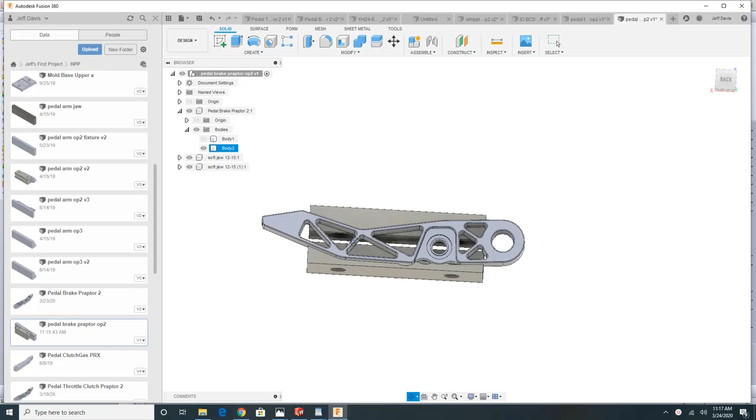Okay guys, let's program op 2 of this pedal arm with me. Again, I can't share the model, but follow along. I hope you get something out of it.

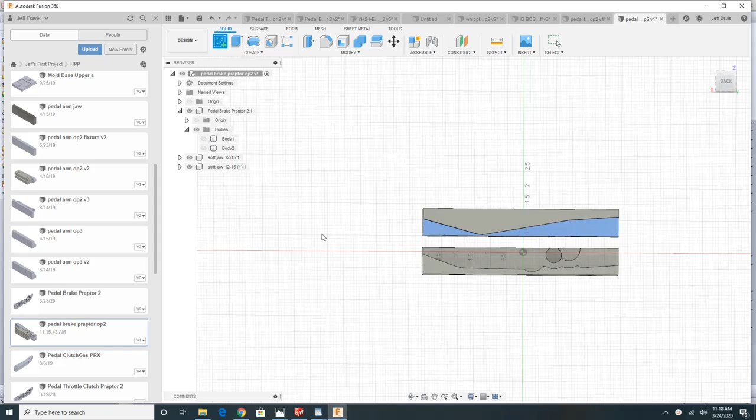So we have this thing in soft jaws, so we've got to cut the soft jaws first. I'm going to hide the pedal body and create a virtual corner on this, similar to what we did with the 1, 2, 3 block. So I'm going to create a sketch, and project that line and that line. Finish the sketch.

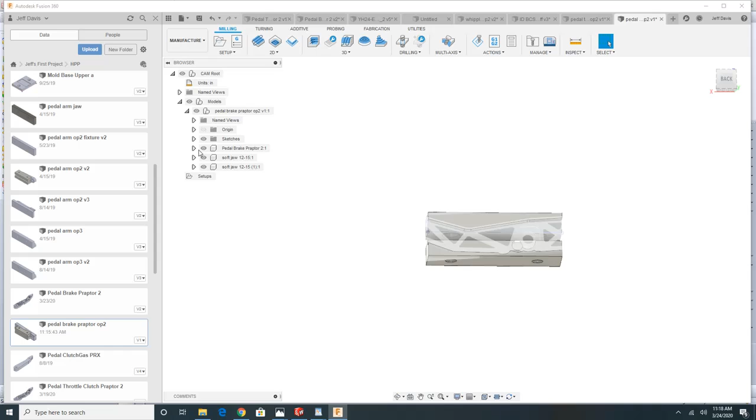Now let's go to our manufacturing forum. Let's open up these bodies here and turn them both on. New setup.

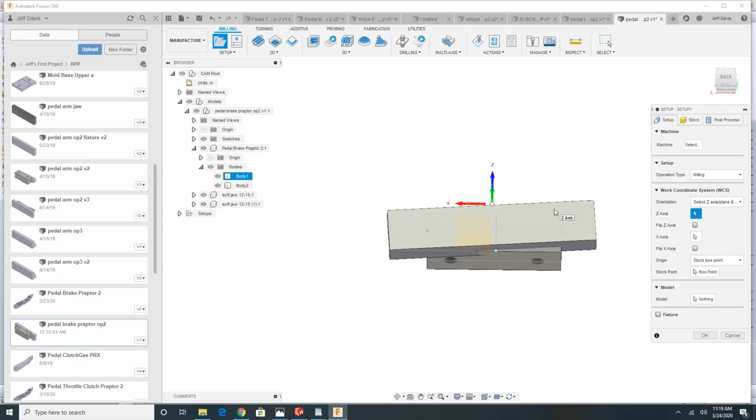For the stock, I'm going to choose this body that I've imported from SolidWorks. It's a milling operation. I'm going to choose the Z-axis plane and X-axis. The Z is going to be the top of the part, and the X is any one of these X lines that's going in the correct direction. Now, as far as where I'm going to put the work coordinate system, I'm going to use that virtual corner on the soft jaw that I created. And then I'm going to hide the stock and choose the pedal arm as my model.

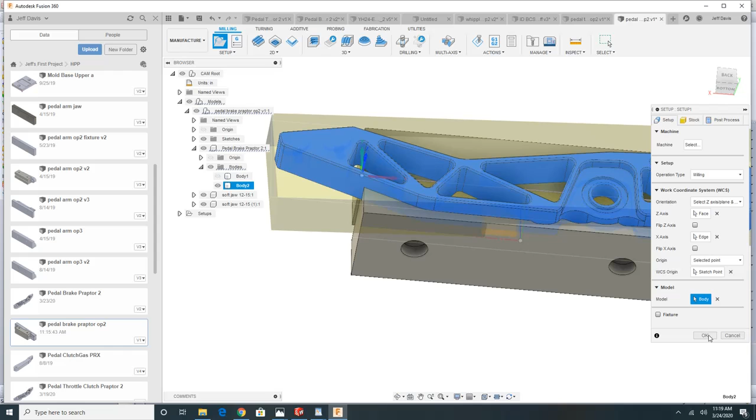Okay, what you guys might notice here is there's some extra cutouts. The reason for that is I'm reusing a soft jaw that was already cut out for something else. No big deal, we'll just kind of cut over it. So let's hide this body.

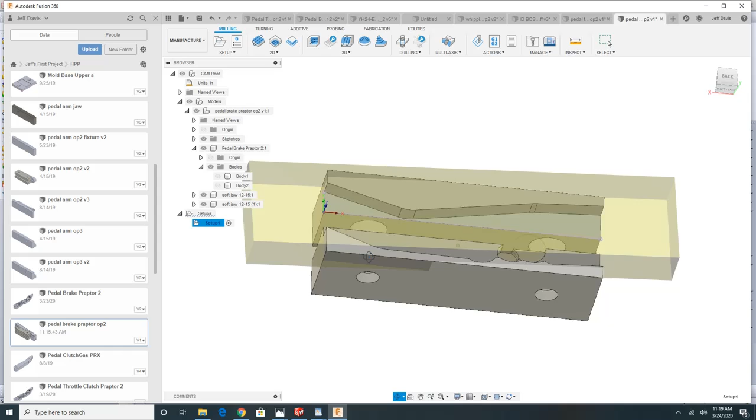What you can see is we've got our coordinate system. Actually, we've got our coordinate system in the wrong spot, so let's fix that. I projected it in the wrong spot.

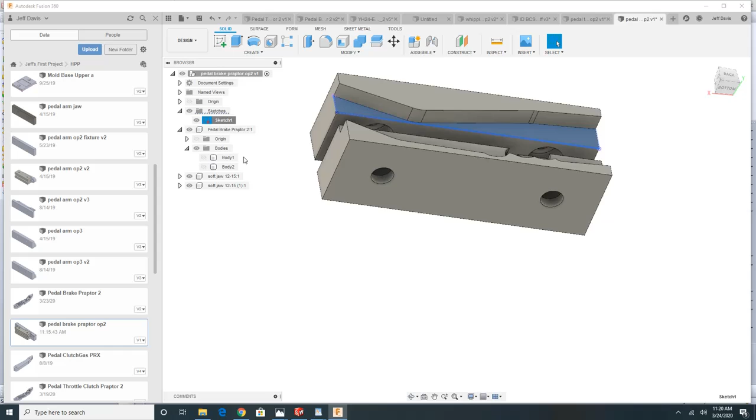Let's go back to our design and let's go into our sketches. And... edit sketch. No, I'm just going to do something else here, guys. I'm just going to create a new sketch.

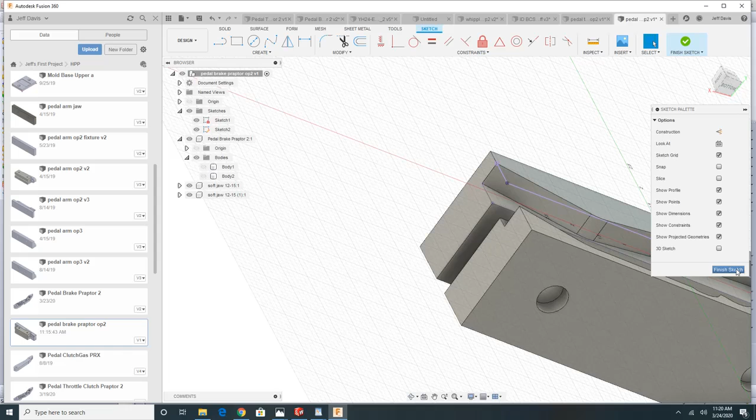On that virtual corner here, I needed it to be on the top. So let's go back and fix our setup. So the only thing that changes with our setup is where we've chosen our coordinate system. It's on now that upper sketch in the virtual corner, not the bottom one.

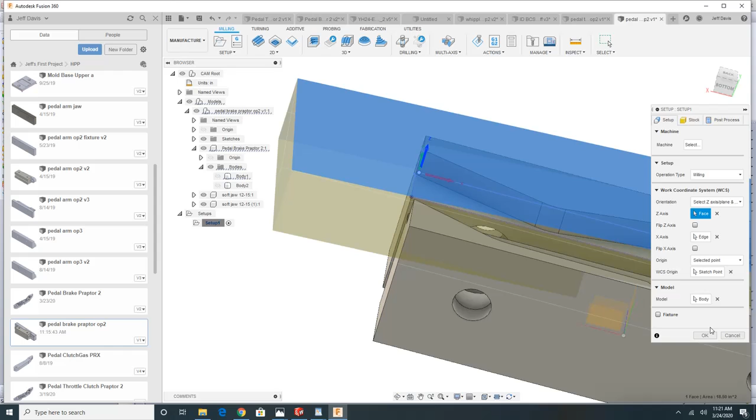Okay, so now, just for ease, I'm going to turn the sketches off. I don't need them at this point. So what I'm going to do here is I'm going to cut these jaws out in the shape of the pedal arm so I can hold it.

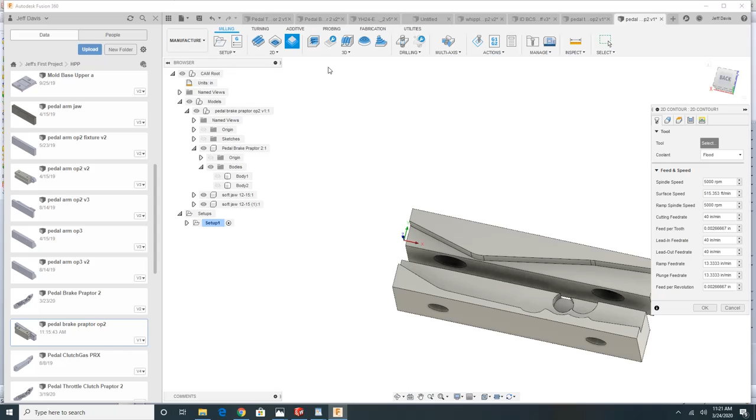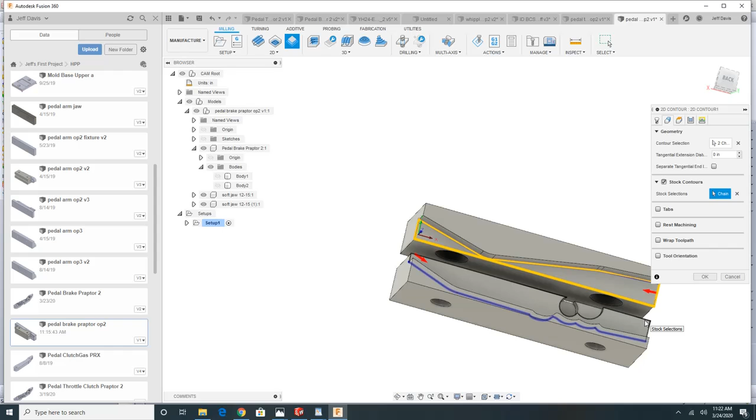I'm going to use a 2D contour, going with tool number 3, my 1/2-inch end mill. And I'm going to select those edges as my edges. As far as the stock goes, I'm going to select these edges. I don't like what that's doing there, so I'm going to come around to here. Now I've got the whole jaw selected as my stock, or the whole cutout as my stock. I can use the selected contours as the Z bottom.

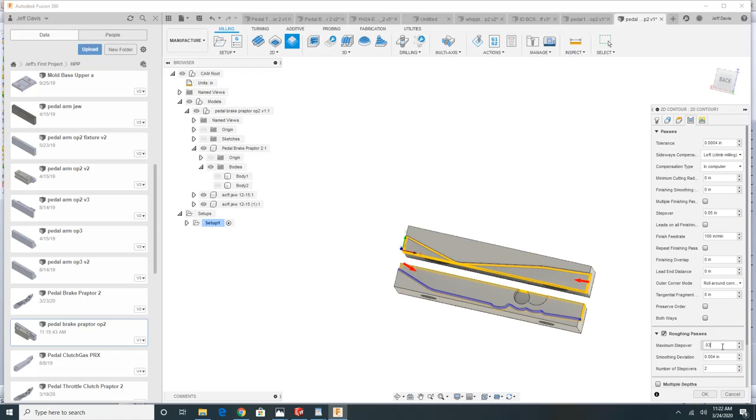And I'm going to do a roughing pass, 2 roughing passes. Let's make our step over 0.3. And that should cover it.

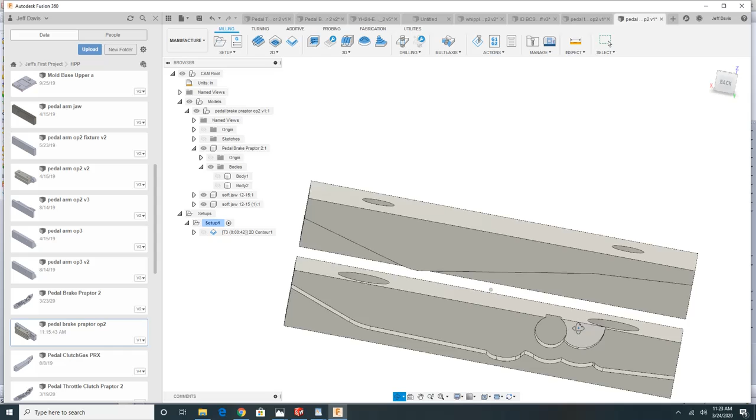So that should get this jaw cut out. I do need to cut out this right here because I'm going to run a reamer through the hole, and I want to make sure that that reamer doesn't hit bottom. So I'm going to simply make another contour right here, same 1/2 inch tool.

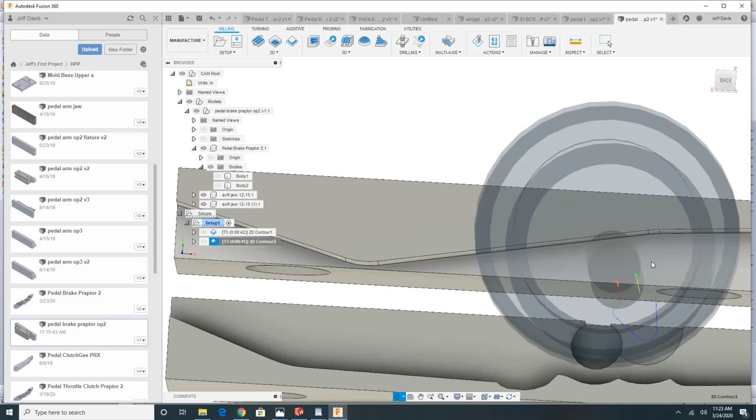And I don't like that because it's going to plunge into my stock. So let's do this. Let's give it a little extra. It might cut into the other side a little bit. That's fine, it's just a fixture. Okay.

So now let's start programming the part. Let's turn the body back on. It's making a 3D adaptive clearing. Tool number 3 is fine. I'm going to speed this thing rapidly up, 225 inches a minute. Lead in, lead out 500.

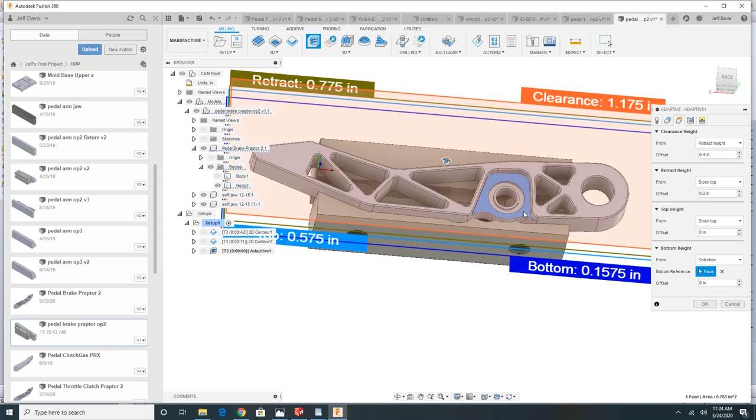Make our ramp 125. I'm not going to choose anything for the geometry. And instead of model bottom, because I don't want to cut to the model bottom down here, I'm going to make this selection right here. I'm going to make our maximum roughing step down 1/2 inch so that we don't have to take it in 2 passes. You guys can see that the stock to leave is 0.2 radially and 0.02 axially.

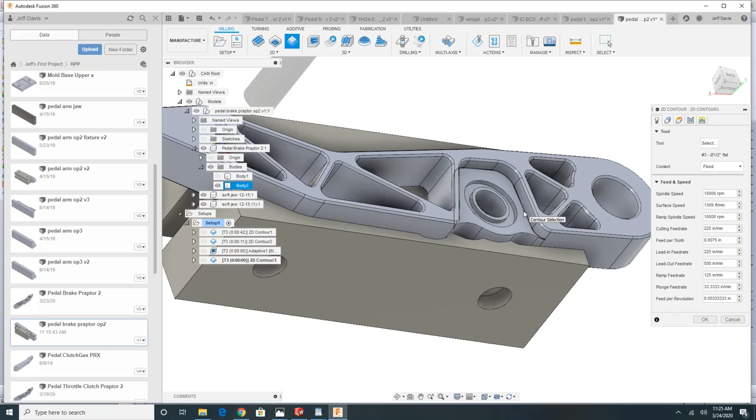So while that's generating, let's make a contour along that edge. Stock contours is fine. Fine. Roughing passes: 0.3. Let's go 3. And our feed rate's too high on this, so let's go back to 100 inches a minute. And let's see what we get. Okay. It's taking a little longer than expected.

There we go. So now we've got to cut the O-ring groove. Again, that's a 1/8 inch end mill. It's a contour. I'm going to select. Now guys, I'm going to cheat a little bit because I just programmed the other side of this, so I've got my tools all set on the other side. So 1/8 inch end mill, 10,000 RPM, 35 inches a minute. You can't go too fast on an 1/8 inch.

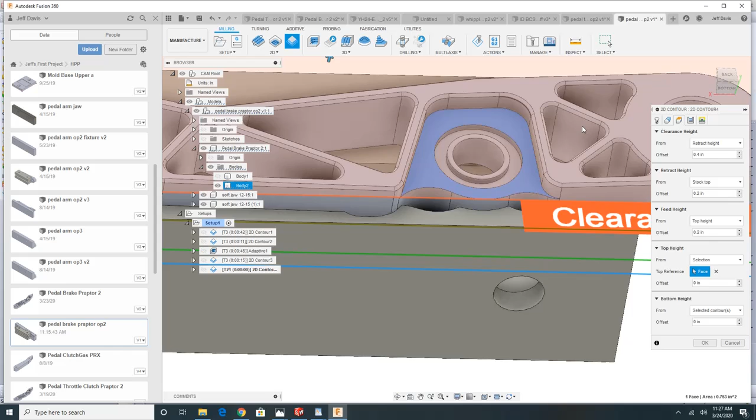Select the bottom contour. This groove is 1/8 inch, so we're going to be basically finishing it all in one shot. But we want to select our top contour as that so that we don't start our ramping way up here. So let's go to ramp. 2 degrees is fine, but we need to take the lead out. Very similar to what we did before.

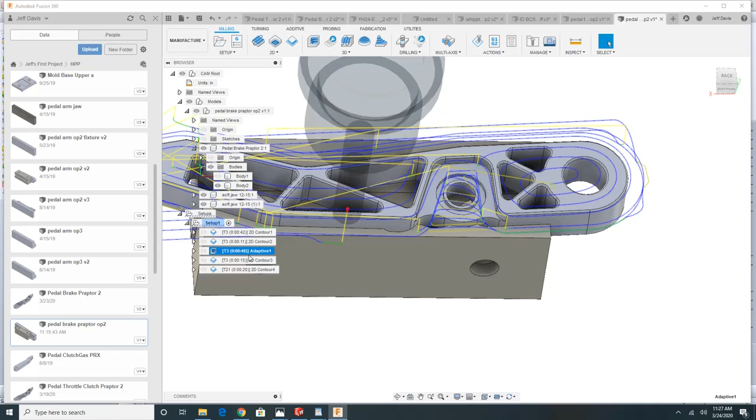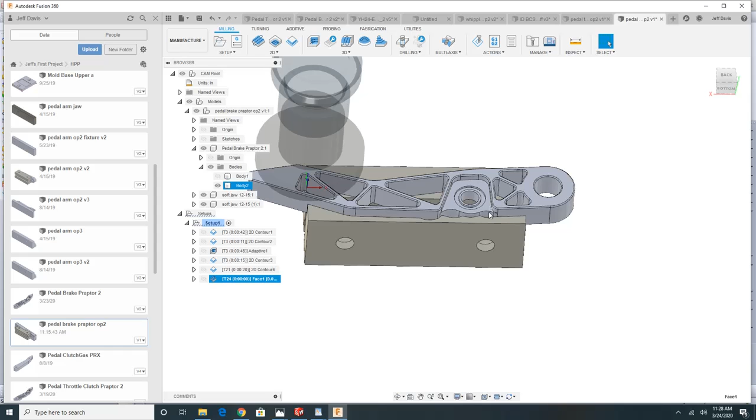Okay. So we've got it roughed. We've got that floor and that wall finished, and we've got our O-ring groove finished. So now let's go ahead and face this thing off. Choose face. I'm going to go with my 3-inch face mill. For me, that's tool 24. 6,000 RPM, 90 inches a minute is fine. You can leave that alone. Let's choose the selection. Let's go over here to climb cut and extend before retract. Okay.

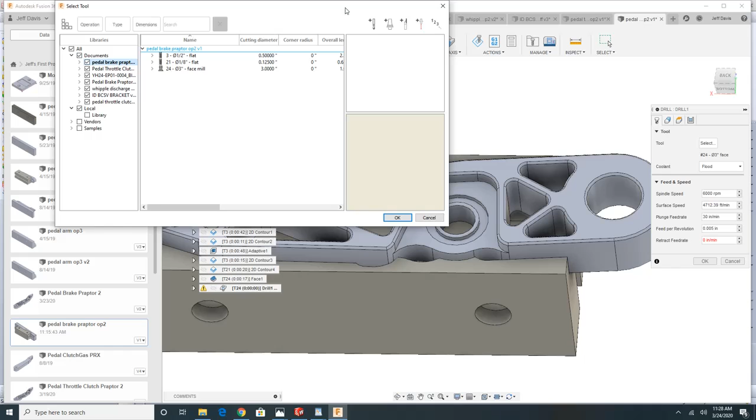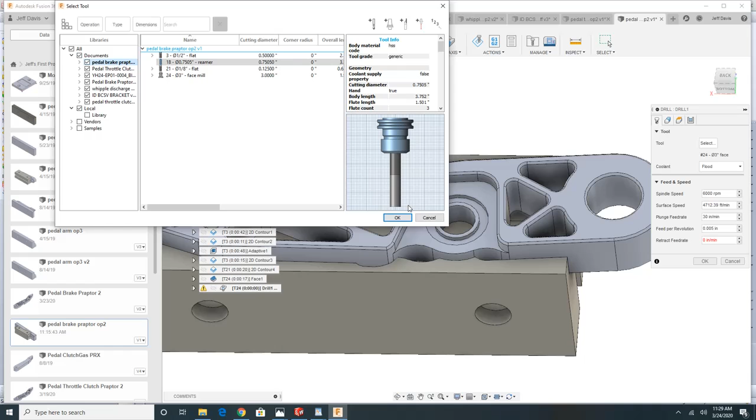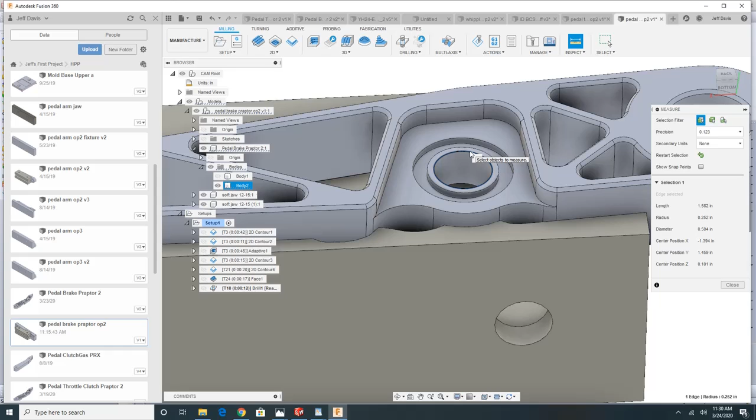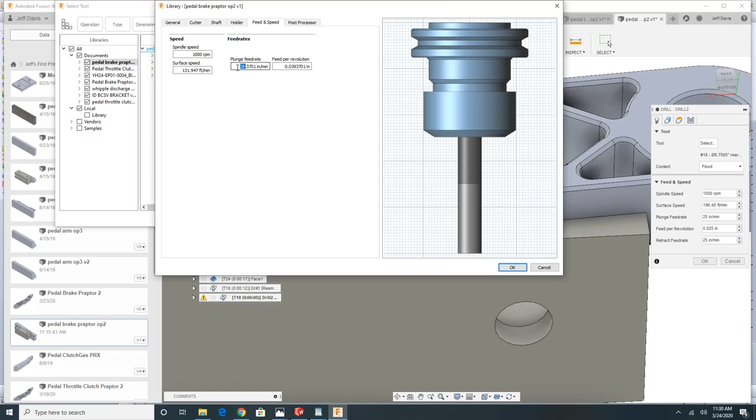We've got to do the same thing with our hole here. It's a precision bore, so we're going to use a reamer. It is 0.504. So we're going to, again, same thing, drilling operation. New tool. Call it 19. Go ahead and select reamer, 0.504. I'm going to use the same feeds and speeds, 1,000 RPM, 25 inches a minute. And I'm going to select that hole.

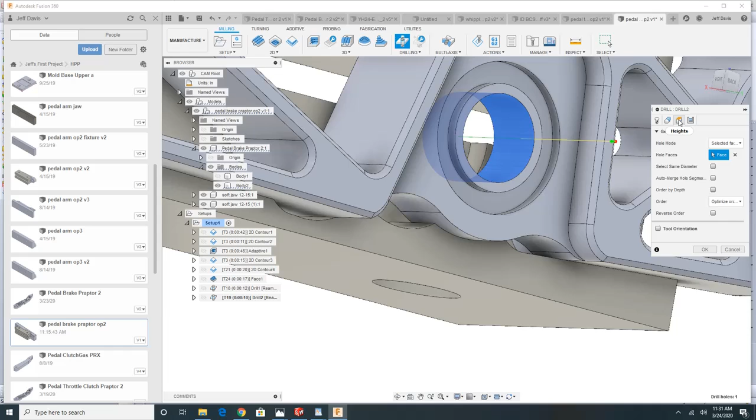Okay guys, here's where we got to be careful. A reamer is not designed to plunge. We want to go past that hole, so what I'd like to do in my heights tab is rather than choose an arbitrary number past the hole, I'm going to select that face right there, and I'm going to make sure I'm 50 thou below that face.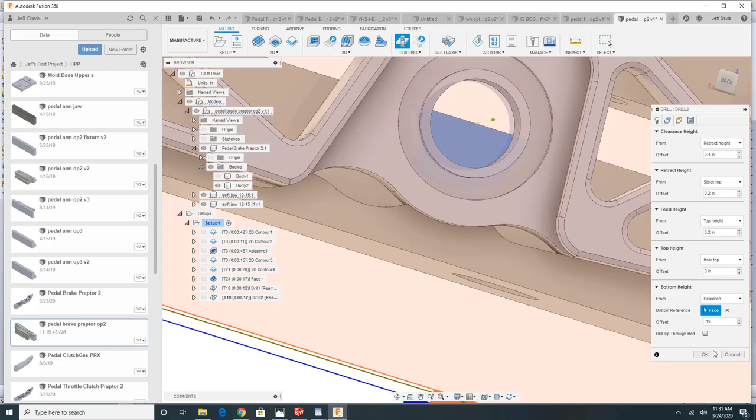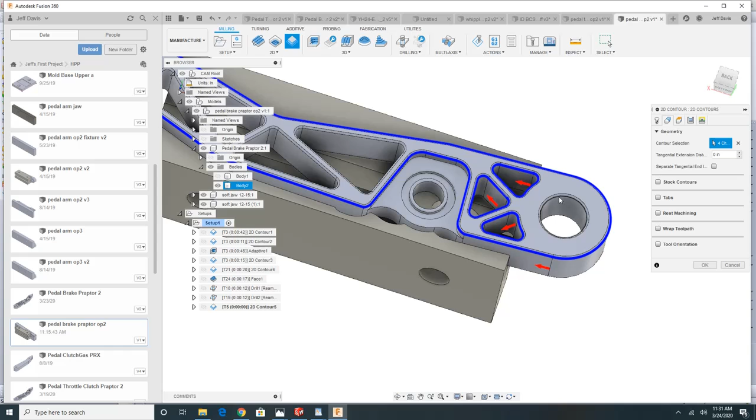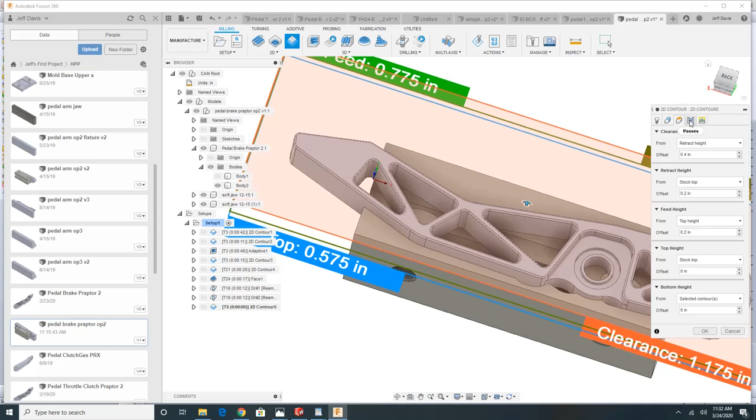Okay, so the only thing left to do is to chamfer this part. Again, since we have the chamfer in the model, we're going to choose a 2D contour. My chamfer tool is always tool number 5. So let's go ahead and select this. I'm going to bump this up to 10,000 RPM and 110 inches a minute, just to speed it up a little bit. As far as our chamfer tip offset, let's make it 80 thousandths of an inch.

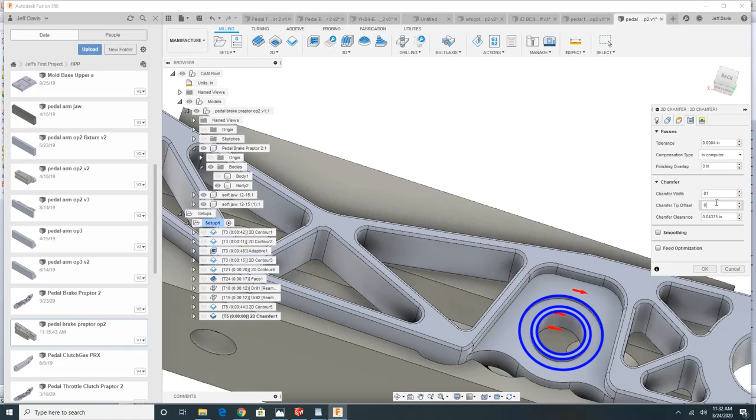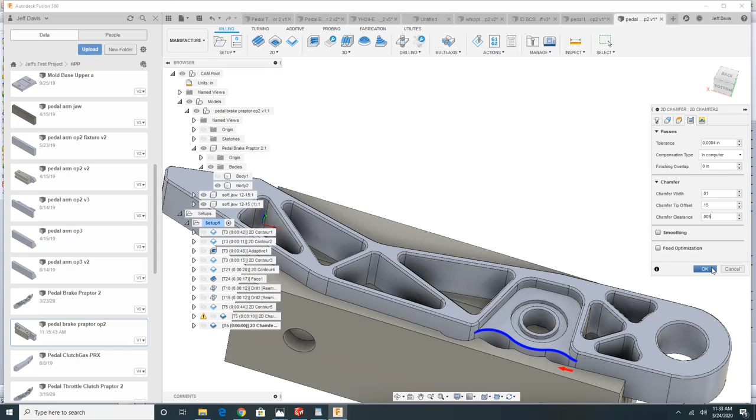Okay, now let's chamfer the O-ring groove and the precision bore. 1, 2, and 3. 0.010 of an inch. It's fine. 0.005. While that's generating, let's go ahead and chamfer that edge. I'm going to select that as my geometry. 10 thou, 0.150, and 0.005 of an inch clearance. But we do have one over here that's got a problem, and it's a lead in and lead out problem. I just know that from experience, so let's just take away the lead in and the lead out.

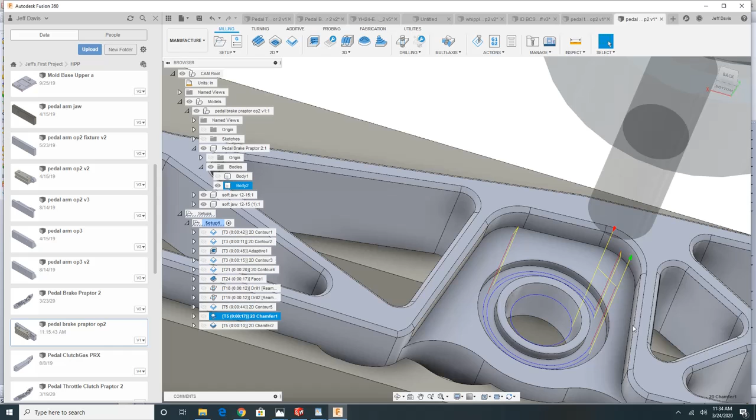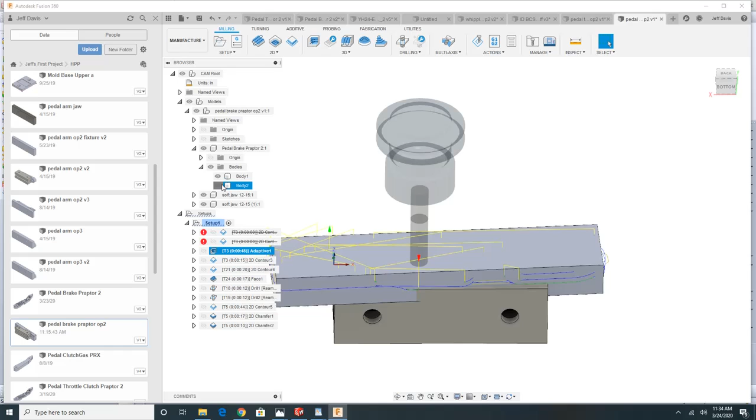Alright guys, so that's as good as we're going to get because our chamfer mill is going to hit that side right there. So when we cut this, we're going to cut the two operations in the jaws first, and then we're going to come back after that's done and suppress that cut so that we can now cut around this part here. What you will notice is we didn't cut anything inside of here. We didn't cut the outside because that was all done, and we didn't rough these holes out either because that was all done in the previous operation if you watched the other video.

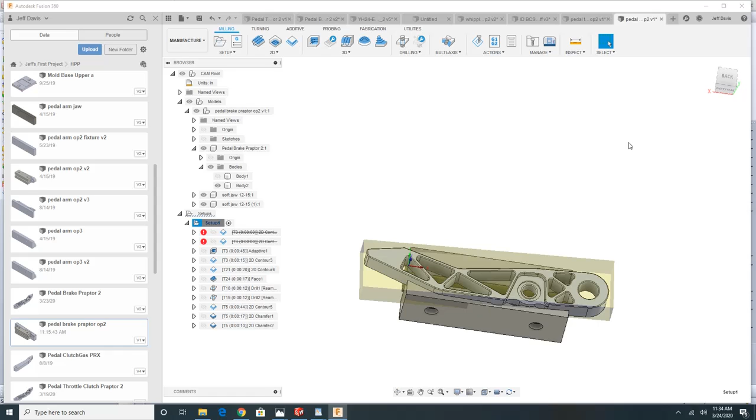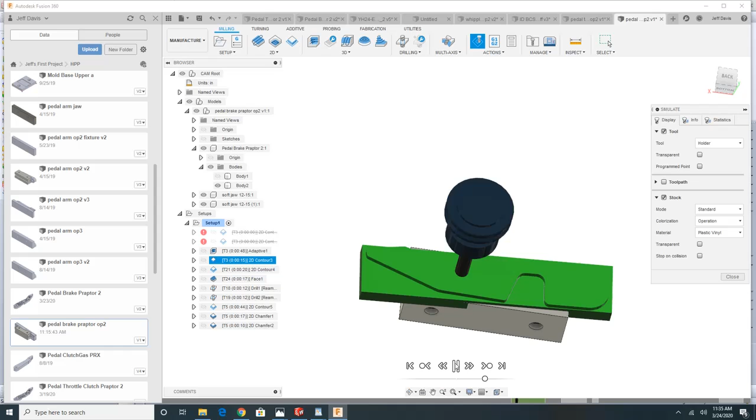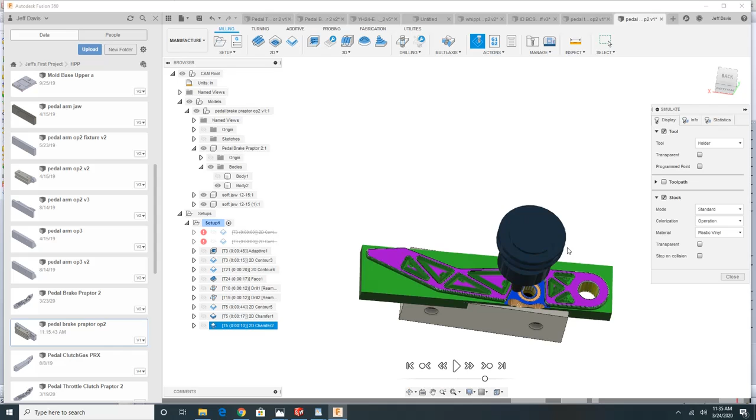So I'm going to simulate it real quick, let you guys look at it. So here we go. There it is. Now what you'll notice is it didn't simulate these holes being there because it doesn't know that we cut them on the previous operation.